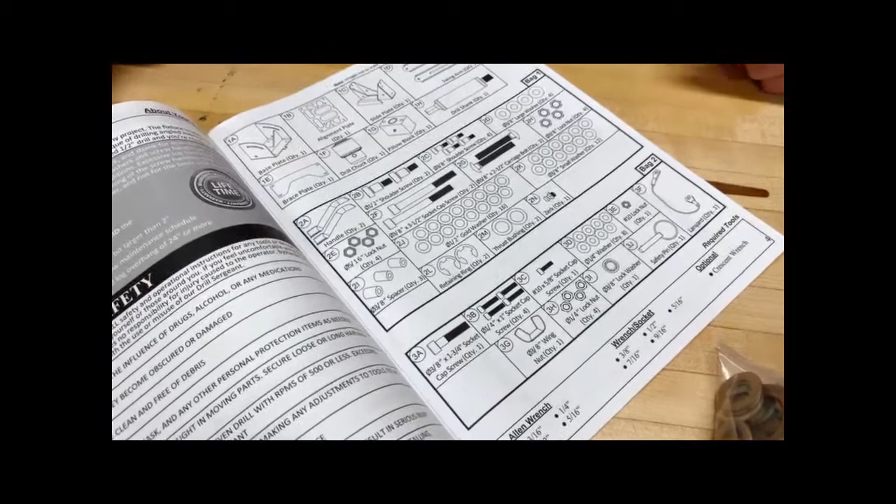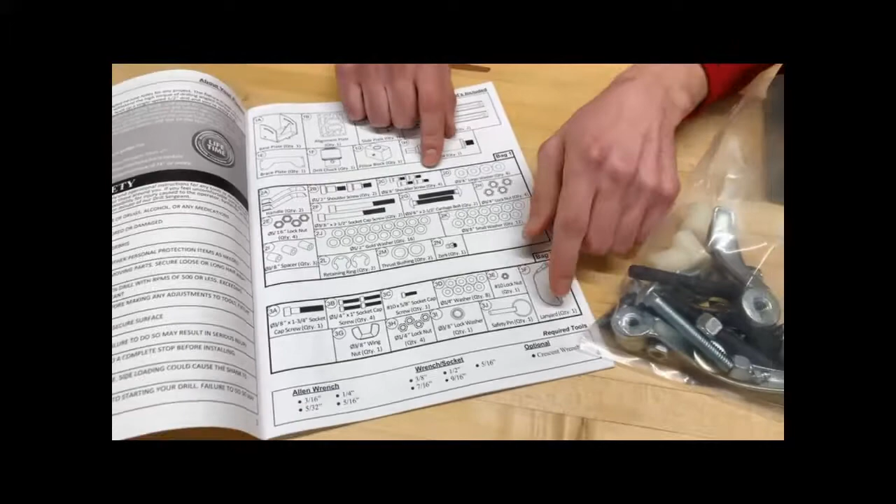Before we get started, it's important to always check in the manual that everything in your box is accounted for. You'll want to check the items listed on top here and reference them to make sure they're in there. There'll be two separate parts bags, labeled 1 and 2, and you can see that on the manual as well. There's also a list of required tools to assemble this.

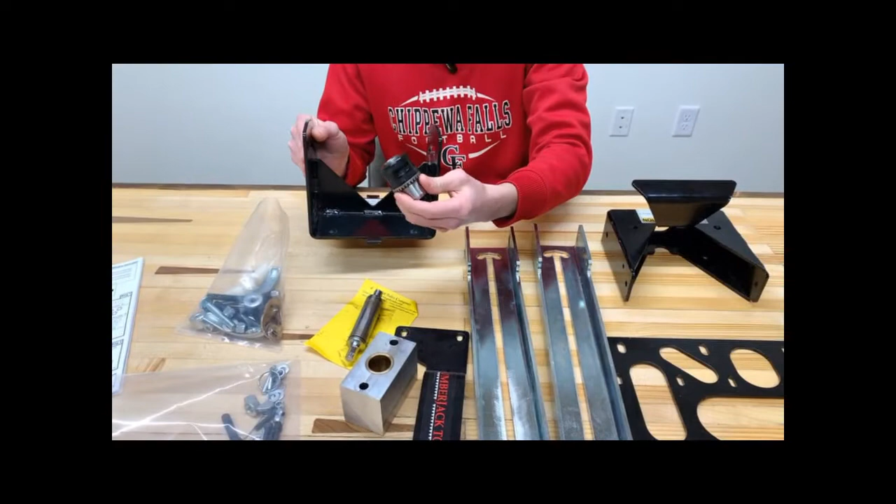You'll see that there's a box that holds both of your arms. There'll also be a wrapped brace plate that goes on top. The base plate will be in a box with the drill chuck, and there will be a box with the slide plate, which includes the shank that goes with this. Lastly, the base plate, always check on the bottom of your box. This is going to be in the bottom of your box wrapped in paper.

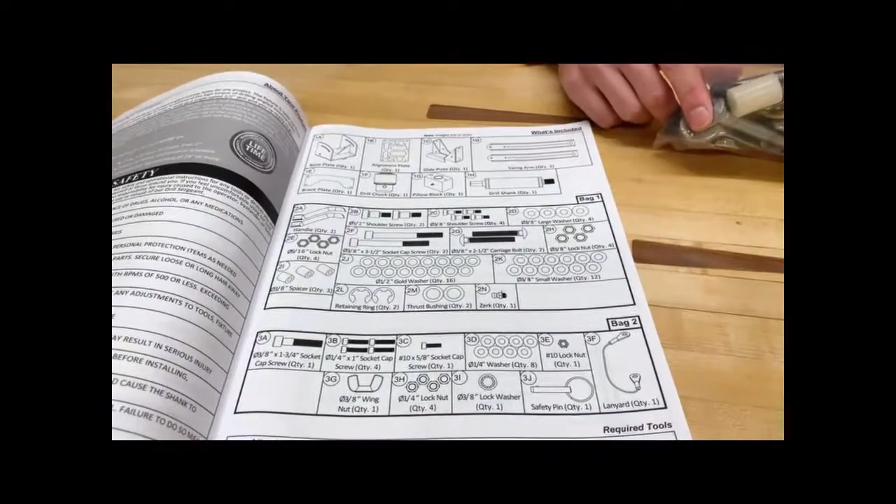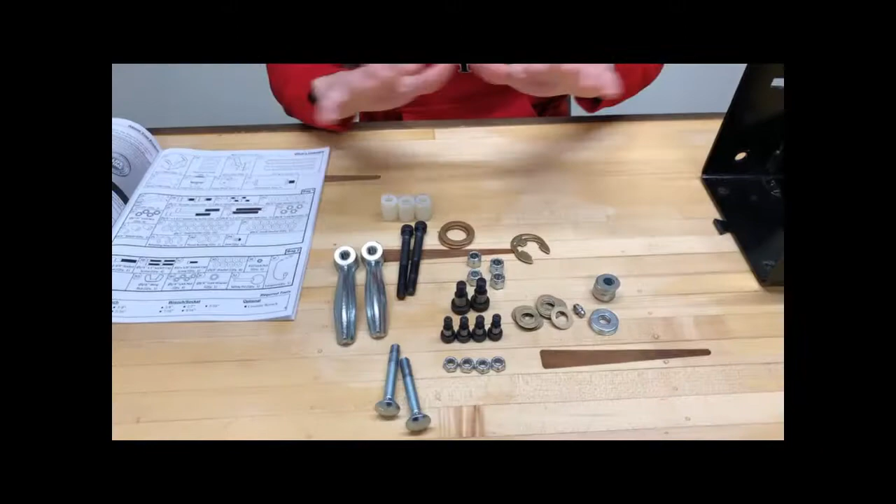The first step is to lay out all your parts here. We're going to start with bag 1, and empty this bag out. Then with a little bit of magic, we'll get these all organized. Just like that, they're all organized.

This first step is going to be attaching the arms of the Drill Sergeant to the base plate, so we'll show you how to do that here.

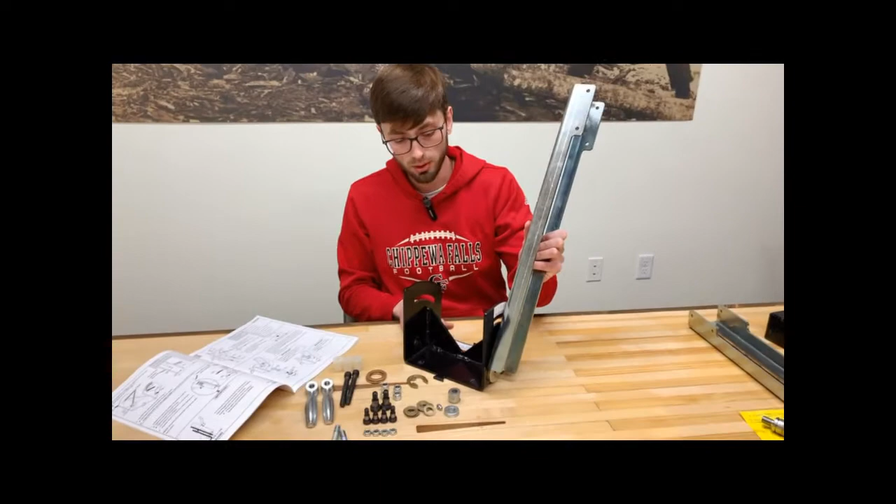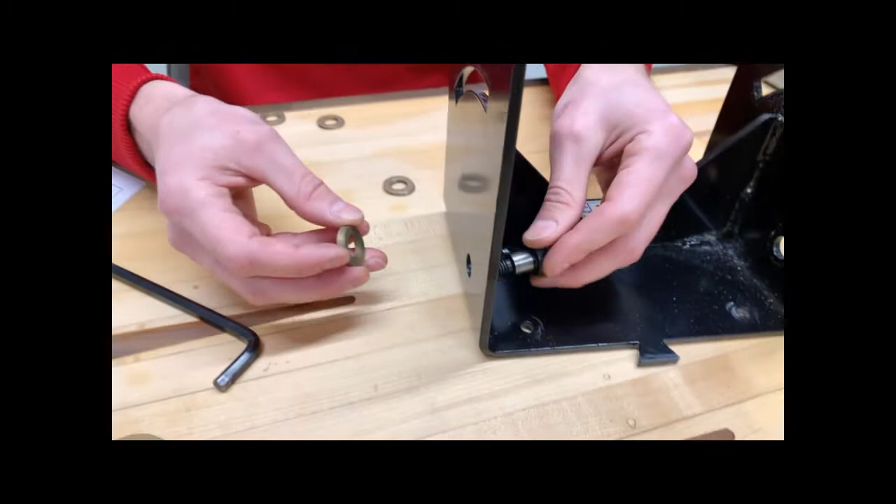To get started, first we need the 1/2-inch shoulder screws, which are part 2B in the manual, and we'll need the gold washers, part 2J. It's a 1/2-inch washer, and there should be 16 of them in your hardware kit. So we're going to set 4 of these on the outside. You want to stick your shoulder bolt through the bottom, and it should just sit in there just like so, and put your washers over it.

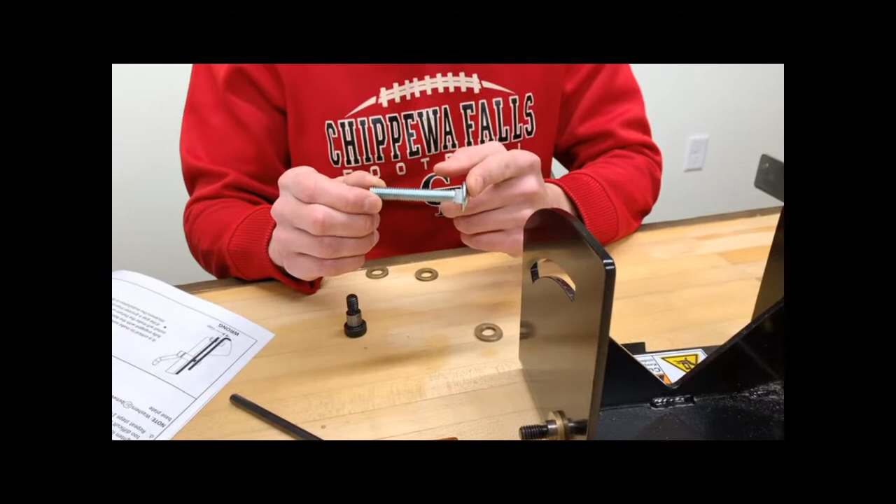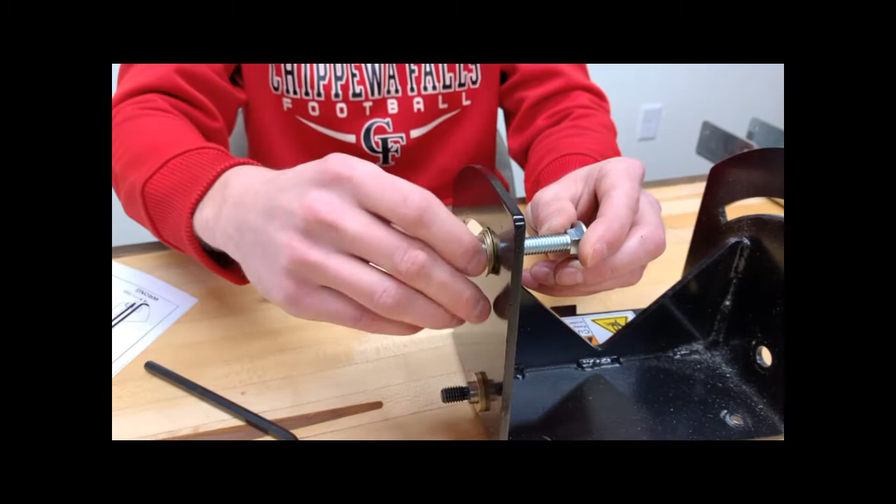Then we're halfway there. Next you'll need the carriage bolt, part 2G, and you're going to also use these washers on it as well. You just want to get it started through here, because we're going to have to attach the arm to it, and put your 4 washers over the outside of this. Then you're going to take your arm and carefully line up the holes so that it should go through both of these at the same time.

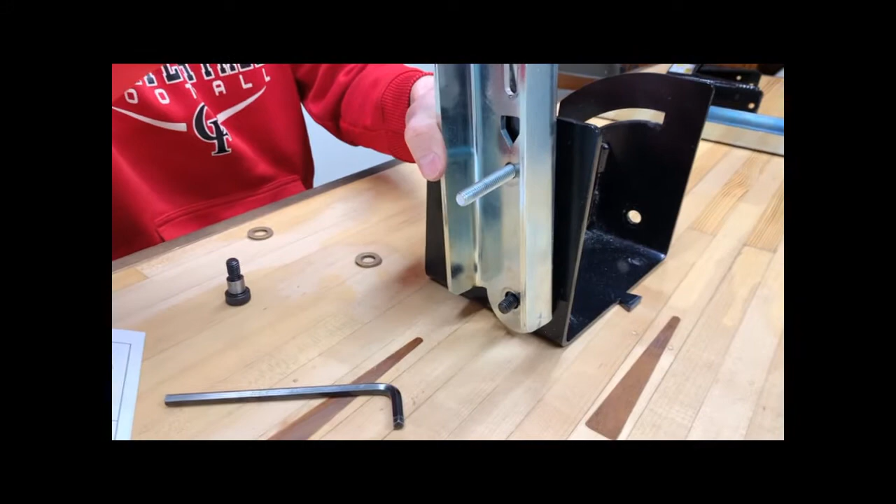And then you can very carefully attach your nut to the shoulder bolt at the base.

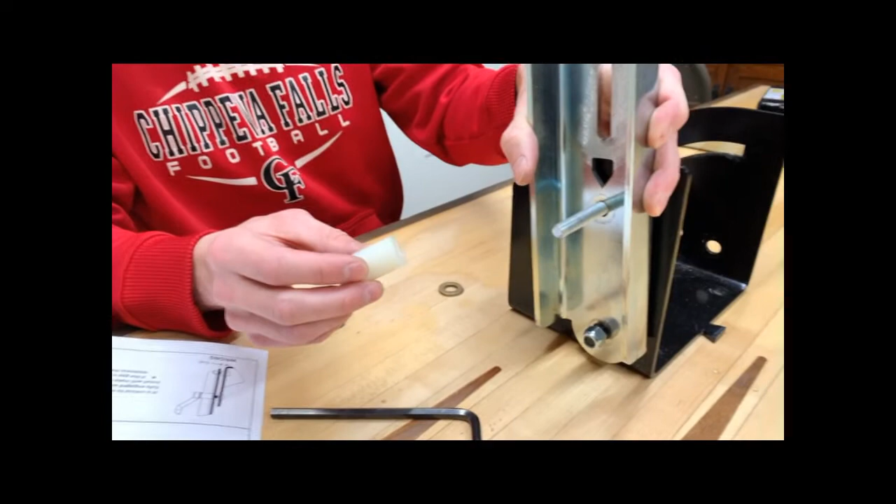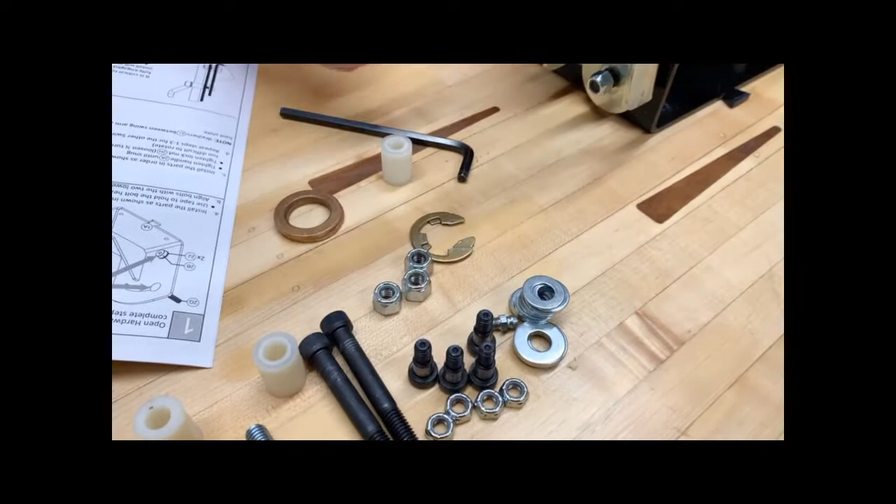Then to secure this carriage bolt, you'll need these nylon spacers, part 2I. But before we put that on, we actually need one more part: the 3/8 inch washers, part 2K. Always be sure to reference your manual and your parts, because there are a lot of parts in here and you don't want to mix them up.

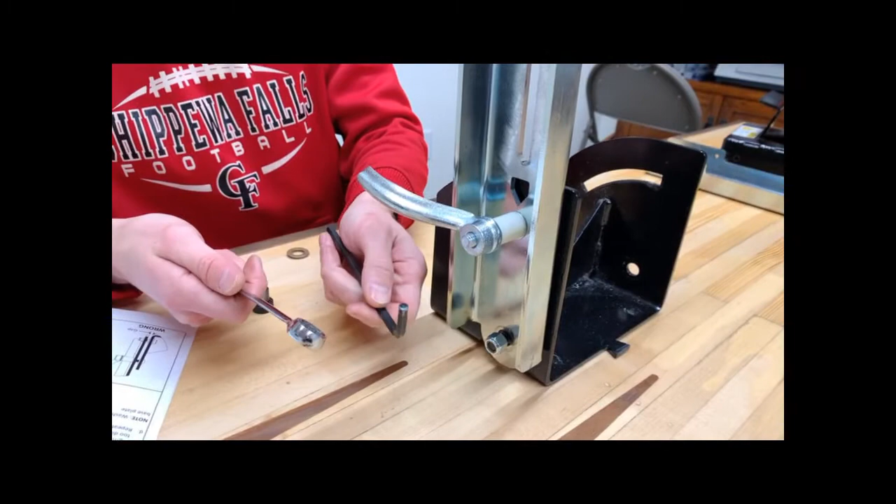Then lastly, to secure that carriage bolt, we need part 2A, the handle nut, and that just turns on righty-tighty. You'll just want to turn that till you feel it firm up. Then I'm going to take a 9/16 inch wrench and a 1/4 inch Allen wrench to tighten up the shoulder bolt.

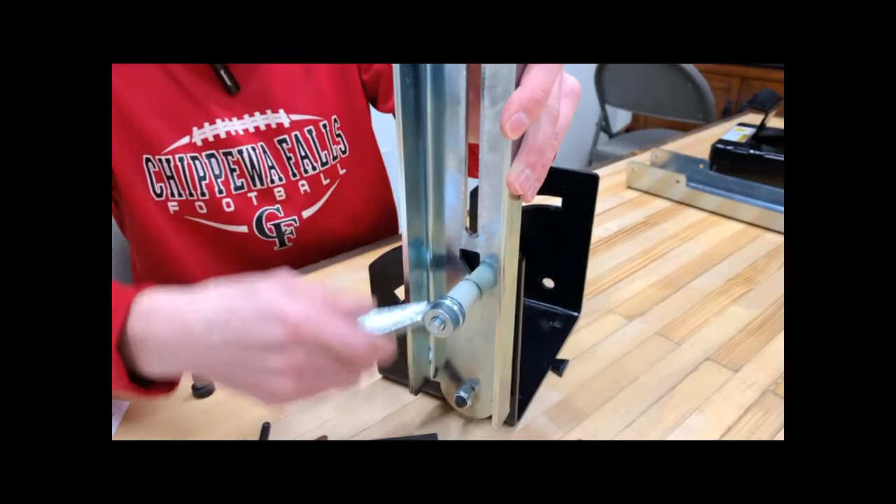Once you've secured your nylock nut on the shoulder bolt, just give your arm a test by gently loosening this handle, and test that the arm can freely adjust before moving on.

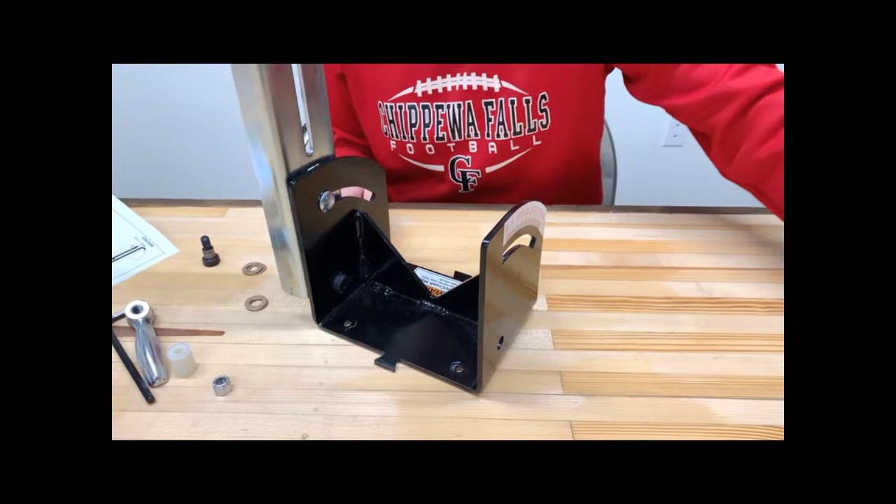Next we'll attach the other arm to the same base plate, just on the opposite side. A point of note is that it's easier to attach these with a second person, because you're holding up multiple items at once, so it's always good to have a second helper.

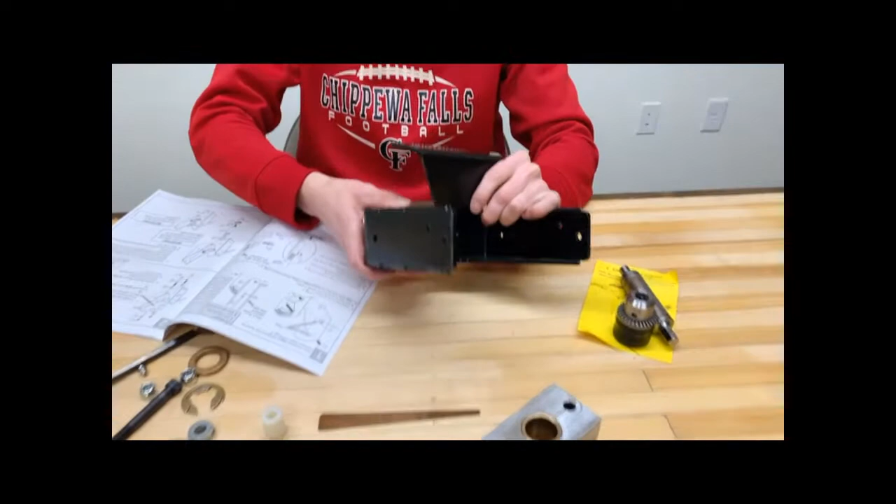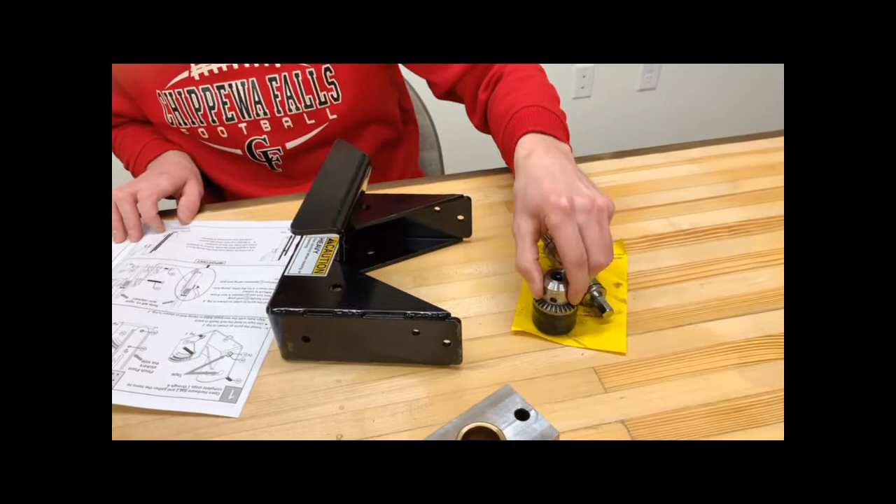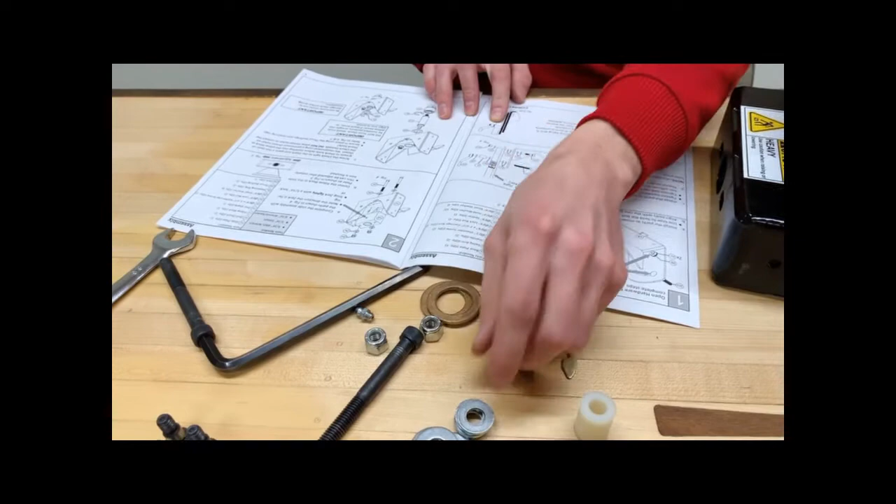For step 2, we're going to complete the slide assembly. This is what goes in between the two arms on the Drill Sergeant. You're going to need part 1C, your slide housing, part 1G, the pillow block, part 1H, the shank that goes in the pillow block, part 1F, your drill chuck head, part 2L, the retaining rings, and 2M, your thrust bushings, and 2K. Pretty much everything except for the nylon spacer, and these 4 parts over here, we're going to need all of these parts.

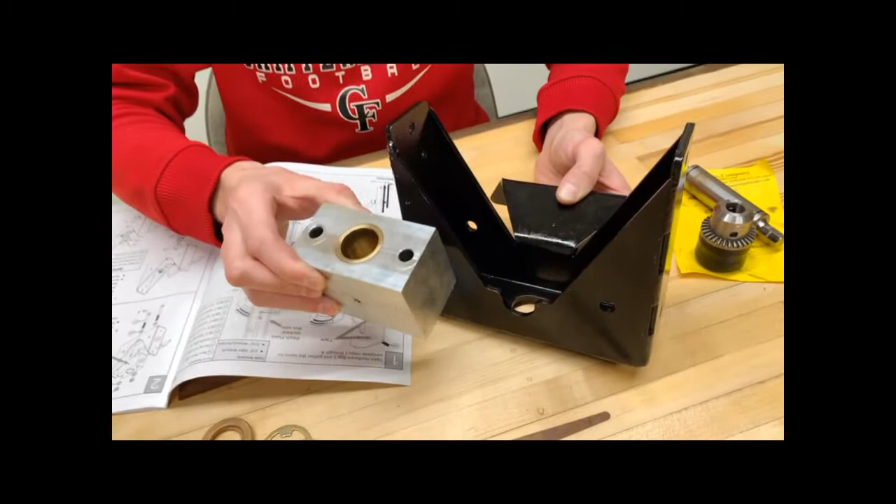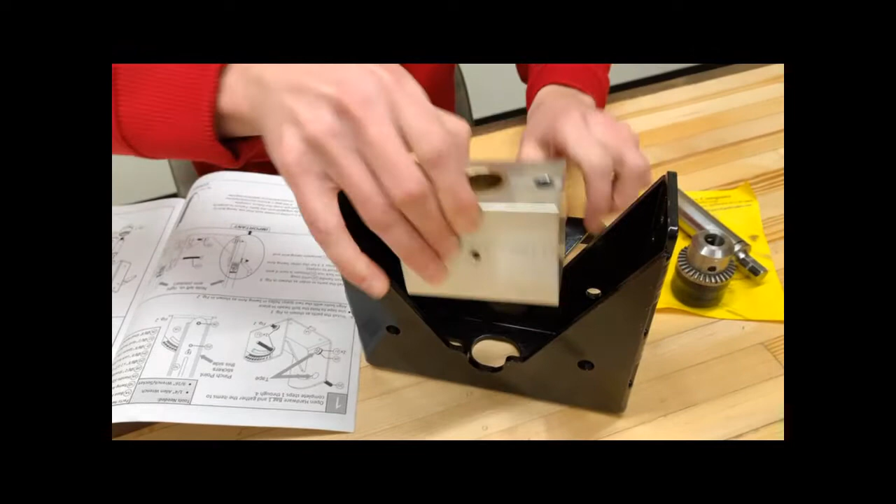For the first part of this step, we're going to put the pillow block inside of the slide housing. It's important to make sure that there's a threaded hole on the front of your pillow block. That needs to be facing in this little U channel here, because otherwise you're not going to be able to put the grease in your Zerk. So you need that hole facing forward.

Then next we're going to need part 2F, which are these big bolts here, and part 2K, more of these 3/8 inch washers. You're going to need a 5/16 inch Allen wrench to tighten these, and a 9/16 inch wrench to hold your nuts.

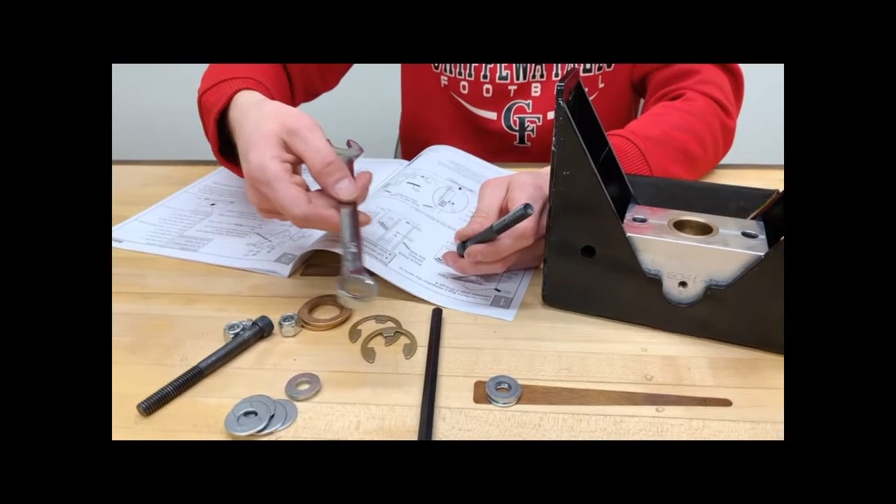Okay, so then we're going to put part 2K, this 3/8 inch washer, over the 3.5 inch socket cap screw, just like so. And then through the bottom of the slide assembly, it's going to come up and your bolt head will stick through. Same thing, this part 2K 3/8 inch washer, and then a 3/8 inch nylock nut to secure that down.

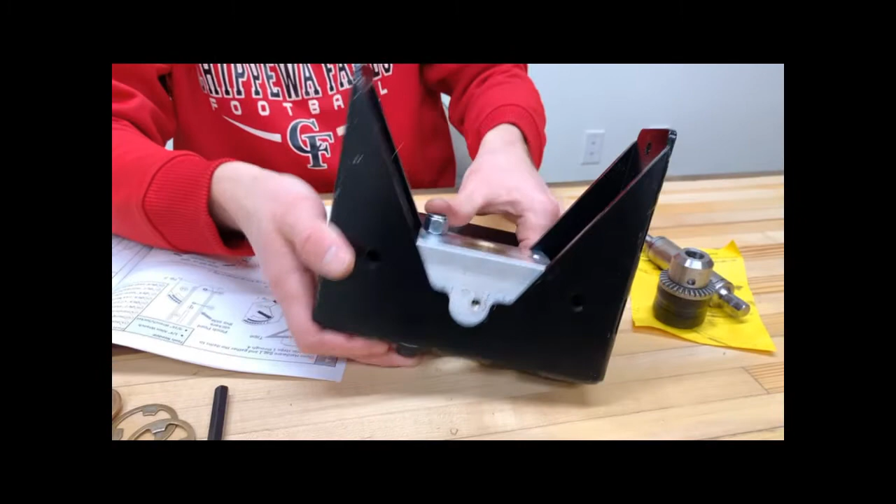Then you just hold the screw with your Allen wrench, and then using the socket wrench, you can tighten this down.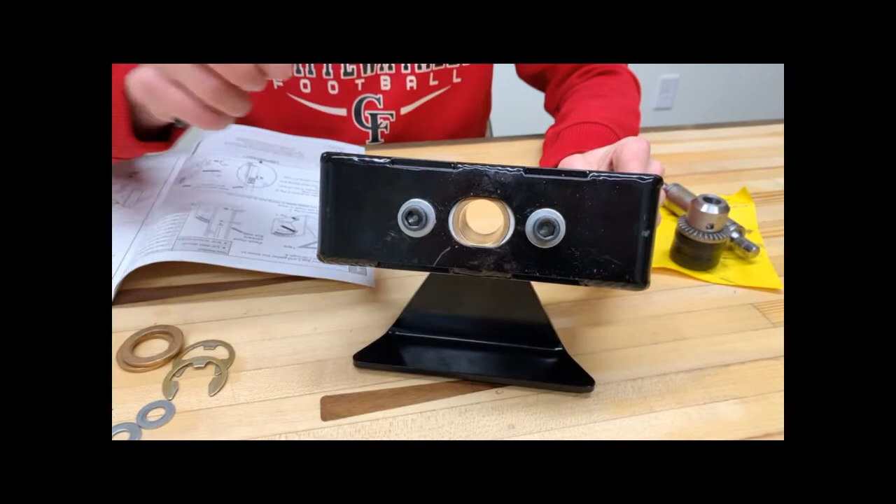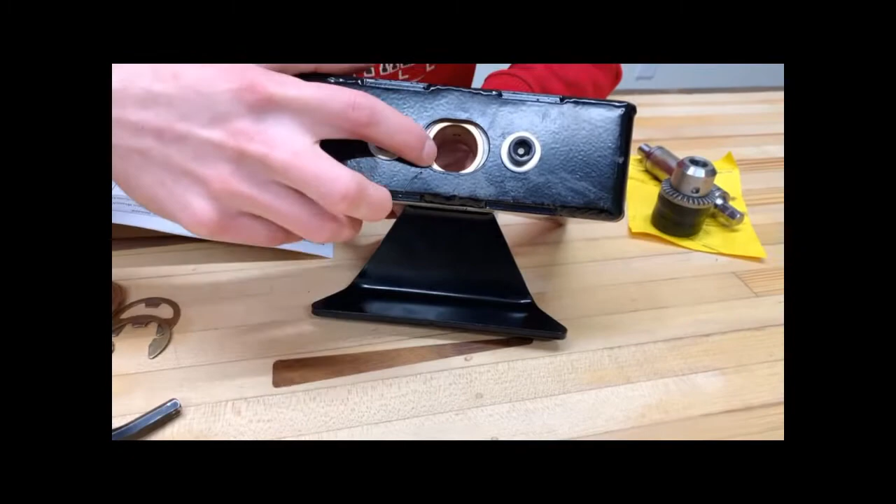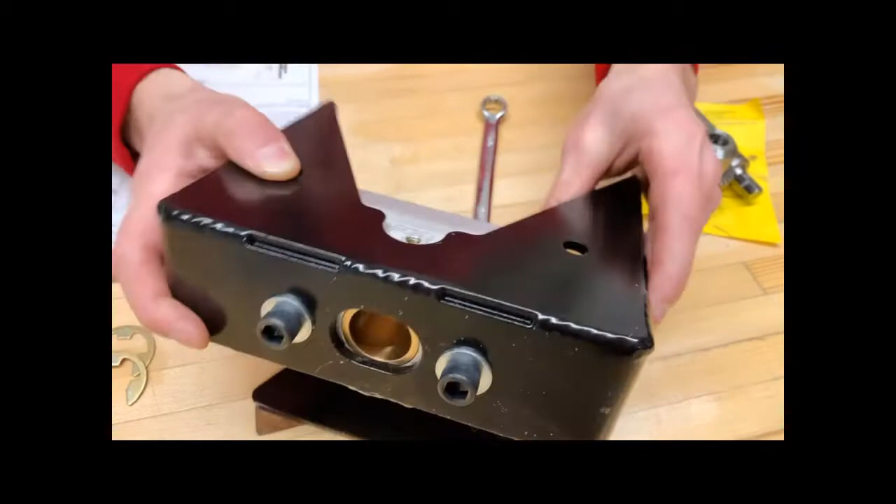So before you fully tighten your pillow block in this assembly, it's very important to make sure that this is truly centered, otherwise your holes are going to be off. As you can see here, I can slide this block back and forth. So you can either center it by looking down the middle here and measuring off both sides, or I like to look in this little U at the bottom and just make sure that my hole is in the middle of there. Then you can rest this like so on a workbench, and tighten it once you know that's in the center.

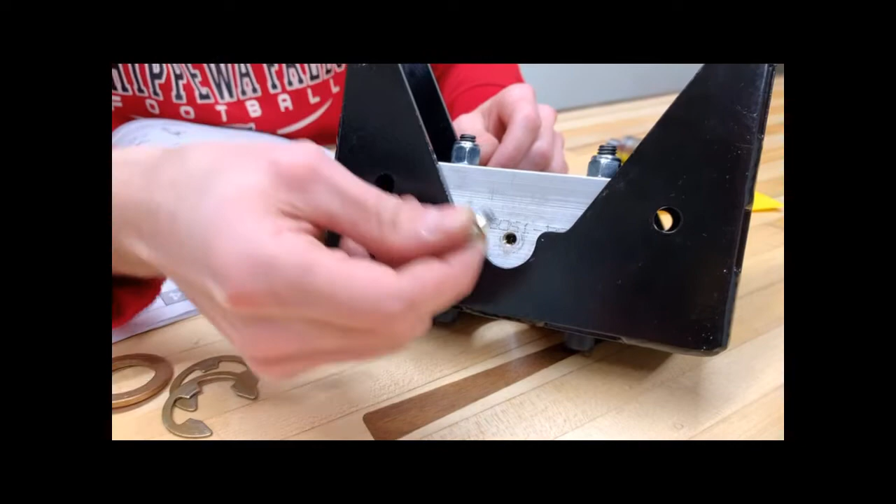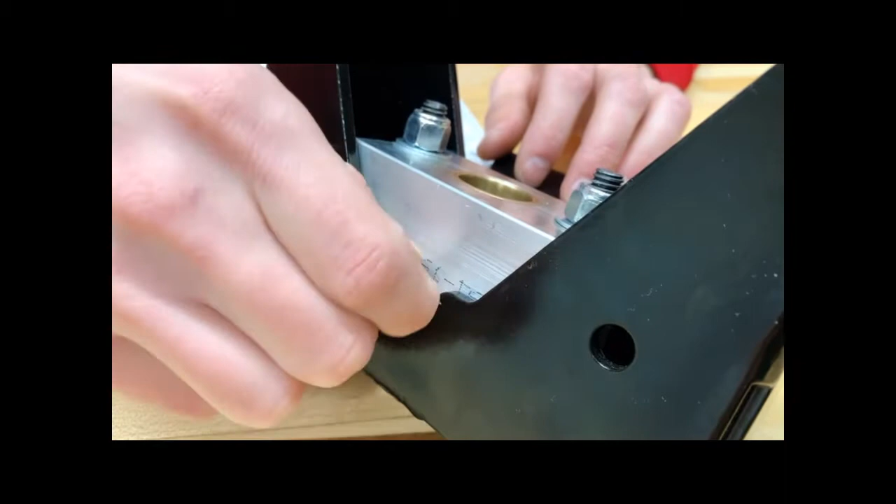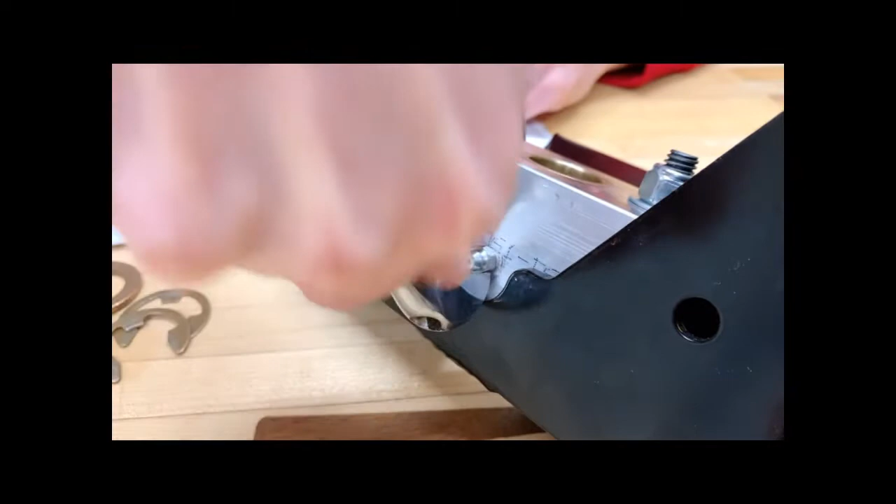Then you need to screw in the grease zerk into the pillow block once everything's secure. It's righty-tighty, lefty-loosey, so I'm going to start this by hand carefully not to cross-thread it. Then I'll grab my crescent wrench and just lightly tighten it. You don't want to over-tighten this and risk pulling any threads. Just a couple of turns to make sure that it's snug, but not too snug. Feel it start to tighten here.

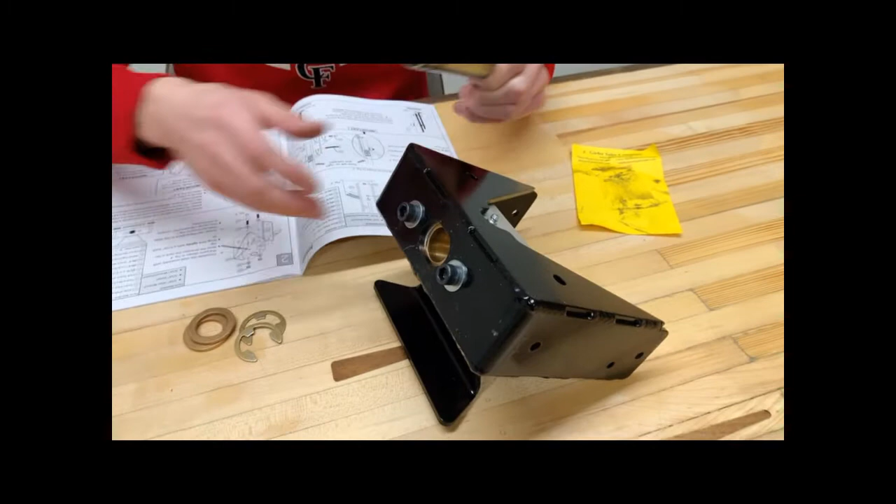Okay, so the pillow block is installed with the grease zerk. Now we're going to slide the shank, part 1H, directly through the hole in the pillow block, and it should slide. It's going to be a tight fit, but it should slide perfectly. And we have 2 thrust bushings and 2 retaining rings.

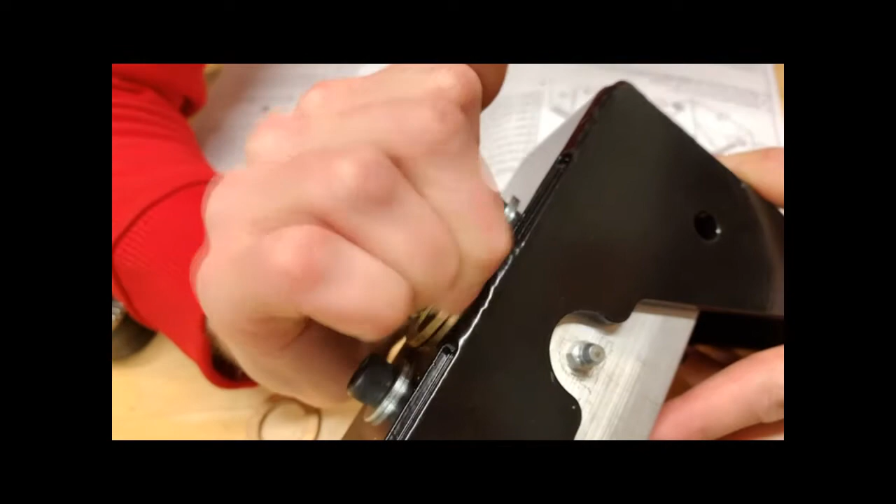So now we're going to take a thrust bushing and put that over. And then the retaining rings, they require a little bit of force, but see this groove right here? These will fit right into the groove, and you push them down. It takes a little bit of force, but it'll snap down, and you'll see it actually hugs around the shank, so it's not going to pull back through. Then it's the same process on the other side.

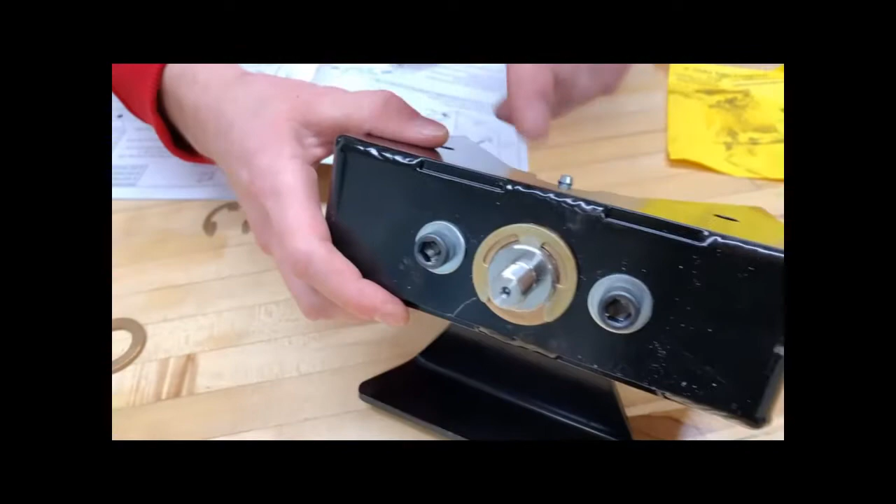Now you put the thrust bushing over, and I'm going to pop one of these on, again, the retaining ring.

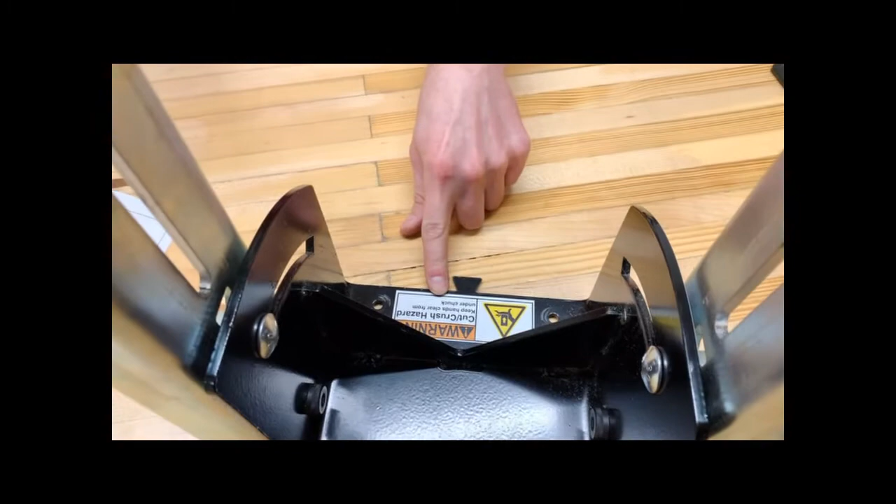Before we install the slide assembly, we have to take the base with the arms here, and we want to lay it down with the back side down. The way you'll know that is there's this cut crush warning on the back, so that's going to be pointing down towards the table. We'll just lay it back like so, and then we'll install the slide.

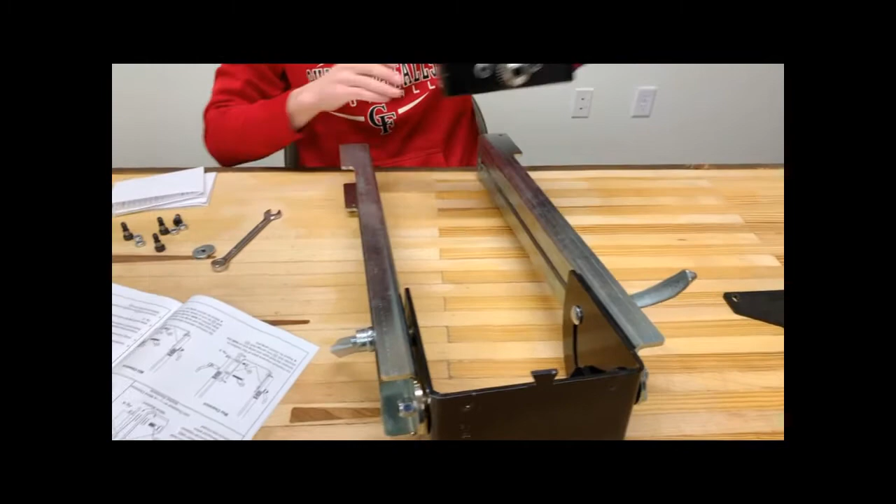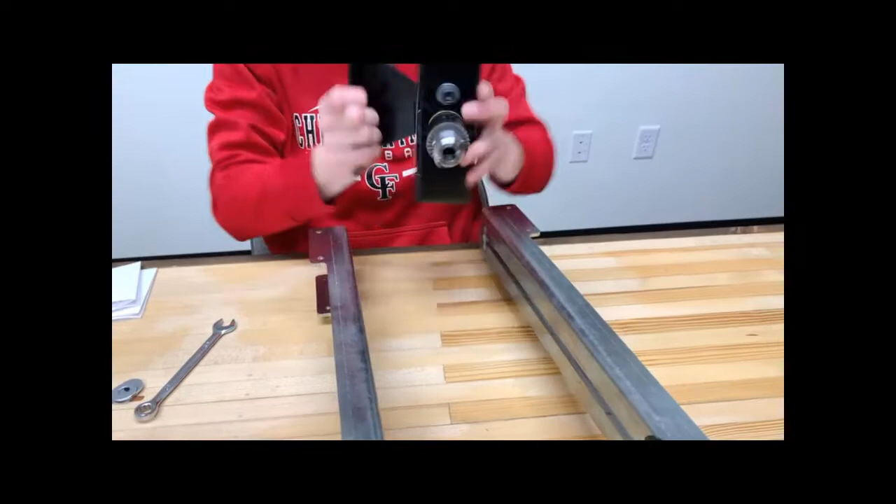And we want to make sure that this handle is facing on the front side and not pointing down towards the cut crush sticker. You want the handle facing away from that.

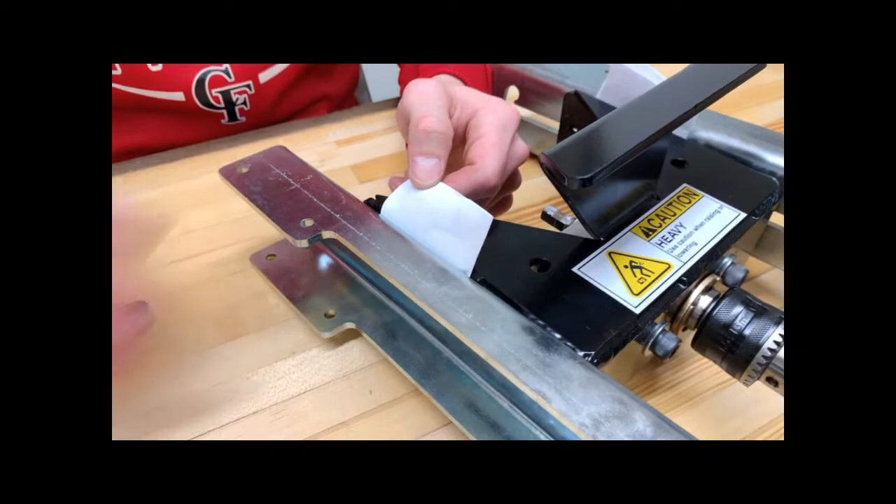Alright, so another tip we point out in the manual is to use paper spacers on both sides of the slide when you're installing it. The purpose of this is to keep the arms from actually touching the slide, so once everything's tightened up, this will freely move up and down without getting caught. You want to take just a blank piece of 8.5 by 11 paper and fold it in half 3 times, and then it will slide on both sides of this.

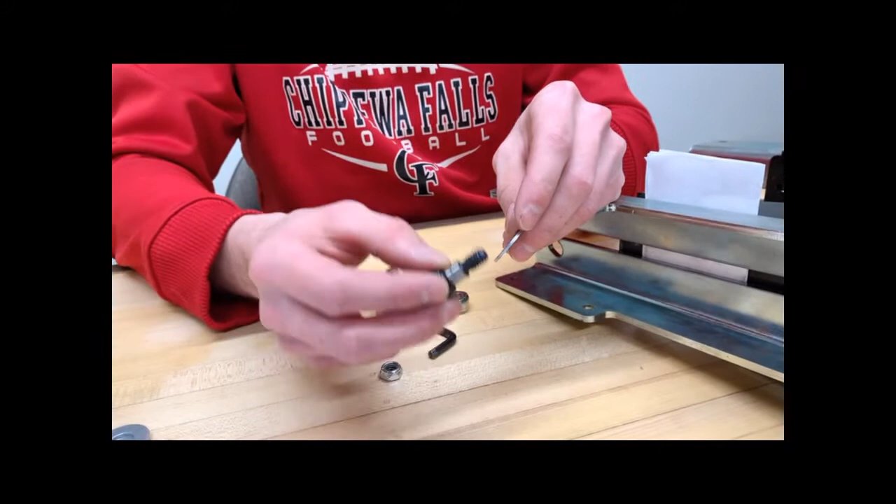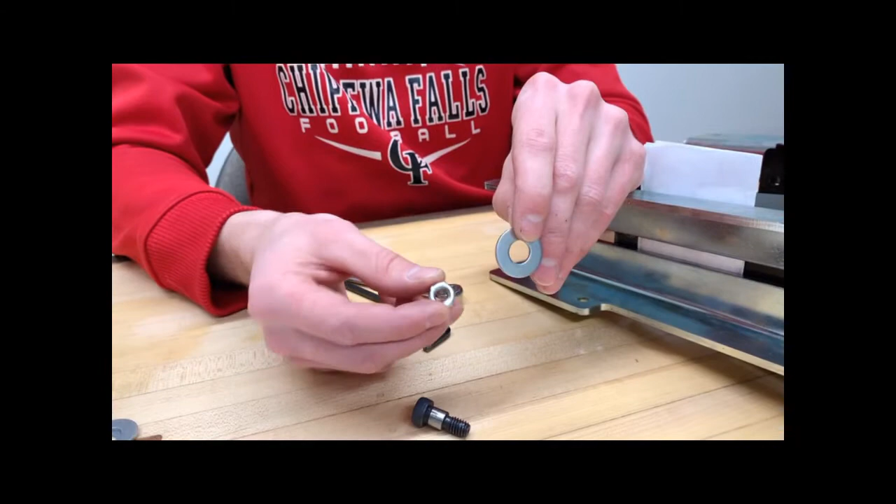So then to install the slide, we're going to do this 4 times. We need part 2C, which is this 3/8 inch shoulder screw, part 2D, the oversized washer, and part 2E, the nylock nut. The washer will slide over the shoulder portion of your screw, and then you'll see there's a little hole on the side here where this is going to get threaded into. So I'm just going to get that started, and it should hand tighten.

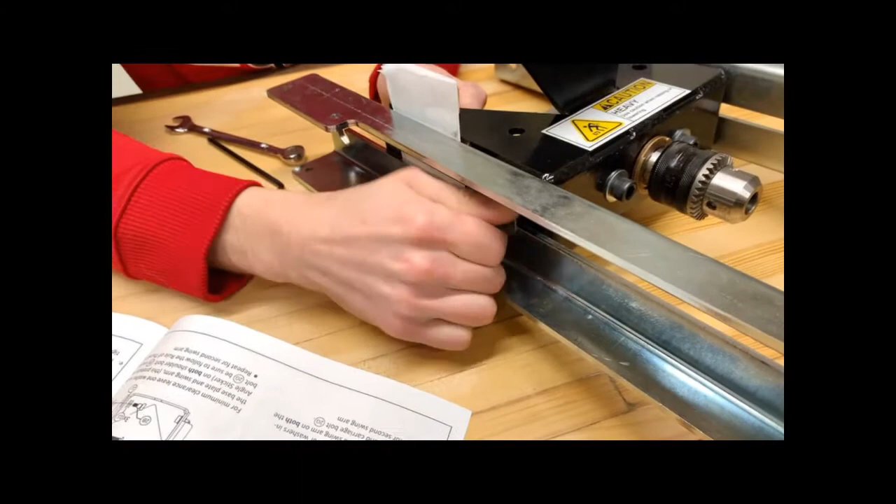It'll kind of get itself started in there, and you can use your Allen wrench to help finish it if it gets a little caught.

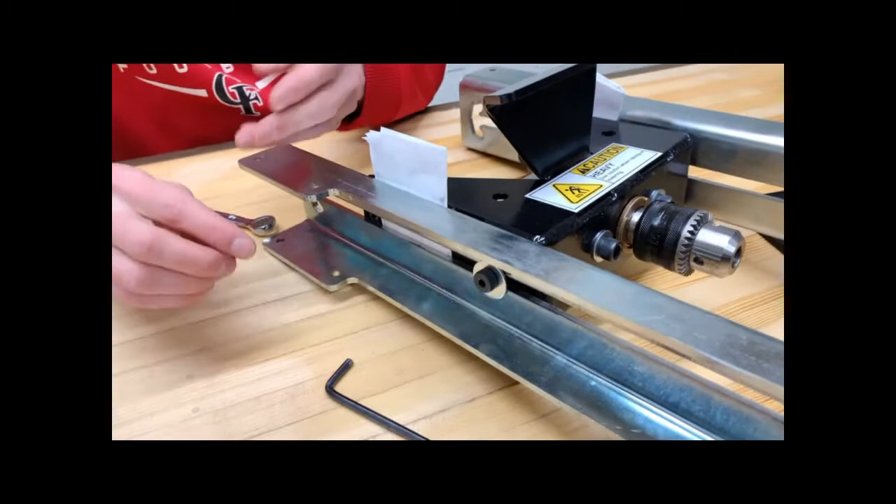Then you'll feel it stop once it's all the way in there. And since this is the lower one, it gets a little tight down there. So what I like to do is put the nut on my middle finger, my longest finger, and reach down inside there. You can't see it, but I'm feeling inside this assembly for the tip of that screw, and then I just hold the nut so that it gets started a couple turns. Once that's actually on some threads, I'll take my 1/2 inch wrench so I can hold the nut in place tightly, and we'll tighten this all the way down until it stops.

So once you have your lower shoulder screw secured, we're going to put in the top 2 on this slide assembly. Same thing, just hold the nut with your wrench and tighten the screw with the Allen wrench.

Once all the nuts are tightened on these shoulder screws, you can remove the paper spacers from the side like so, they'll just pull right out. And this should, yep, it's sliding pretty good. Okay, so the slide's installed.

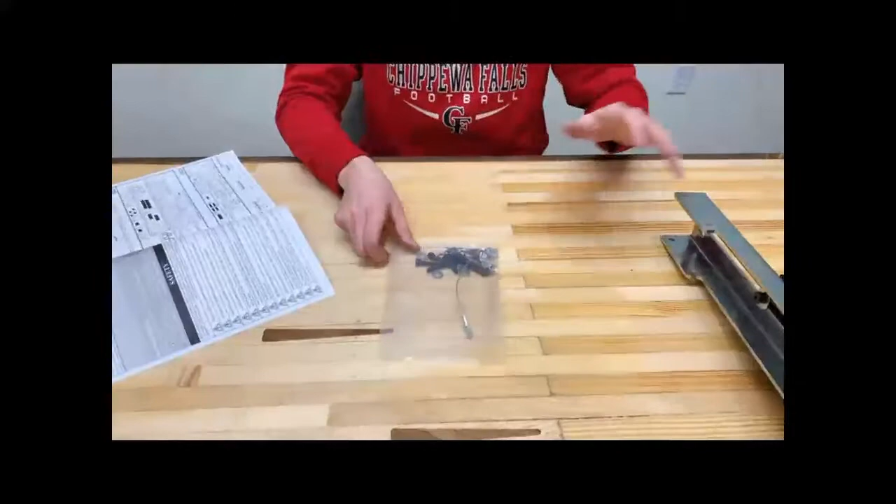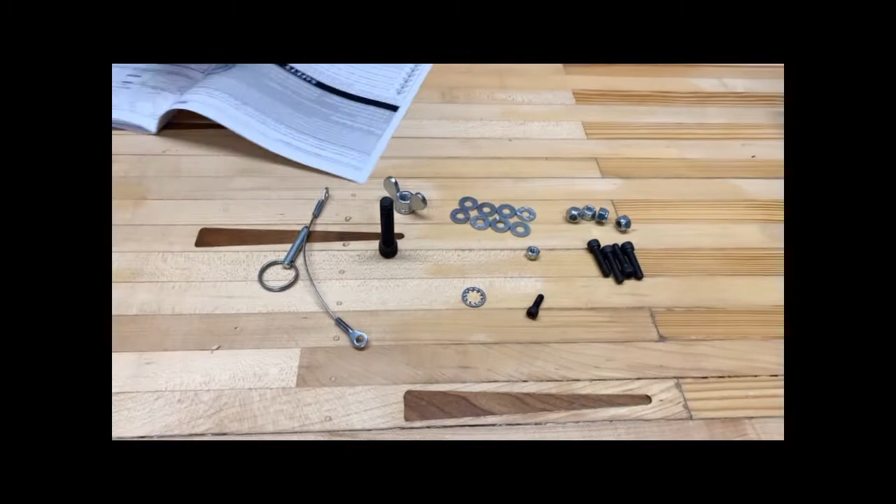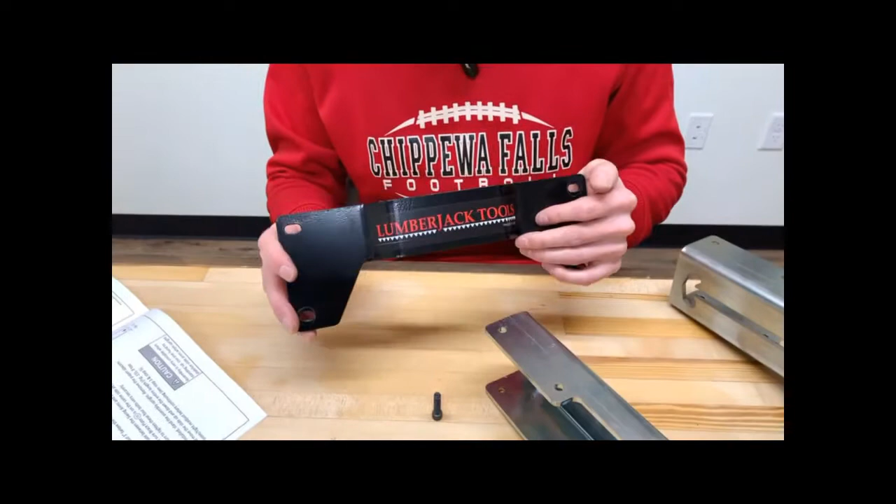So next we're going to need parts 1E, the brace plate, and then 3B, which is your 1-inch socket cap screw, 3D, which is your 1/4 inch washer, and 3H is the 1/4 inch nylock nut. We're going to need all of the washers and the screws and nuts from that part.

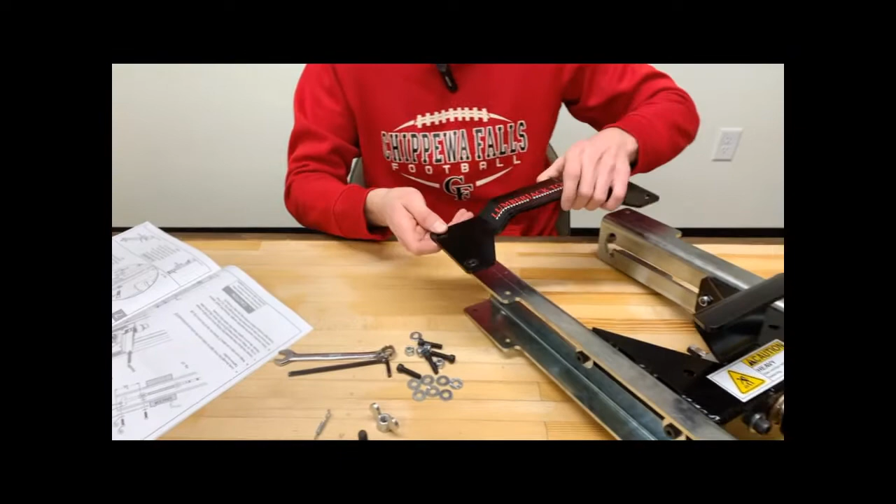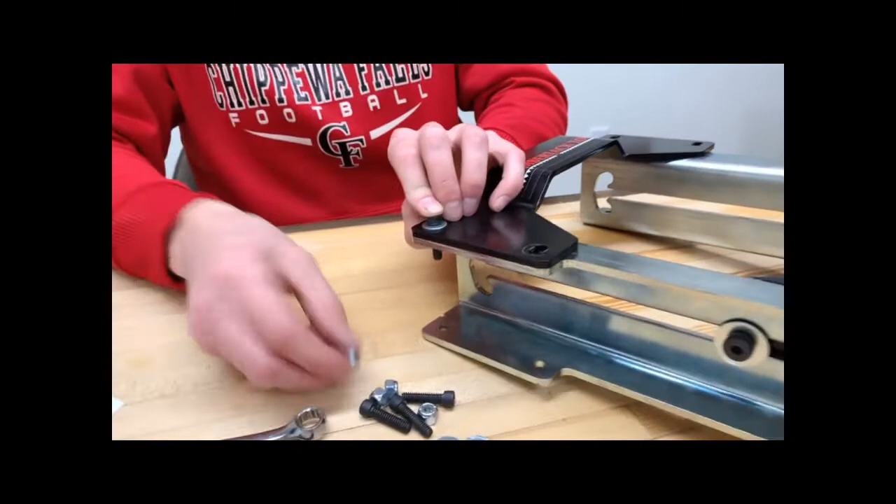To get started, we're just going to secure just one side of this brace plate, so if we have to make any adjustments by widening it. Take your washer, put it on your screw, put it through, and then same thing, put a washer on the bottom of that, and then a nylock nut to hold it all together. Just get your nut started, and you can hold that in place with a 7/16 inch wrench.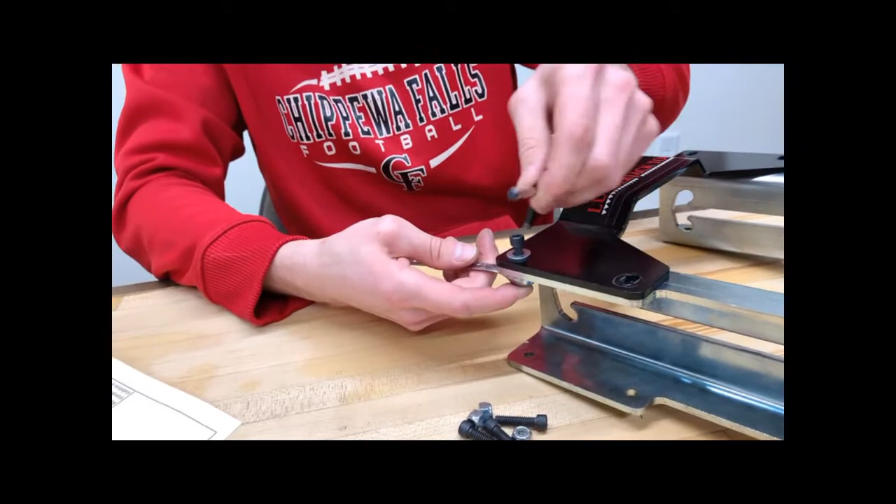And then I'm going to use a 3/16 inch Allen wrench to tighten this down.

So before we go ahead and completely secure this brace plate, take your slide assembly one last time and just make sure that you can go all the way to the top without feeling any resistance. This might be hard to tell, but I like the smoothness that this is gliding at, so we don't have to make any adjustments.

If you did need adjustments, you're going to need a second person to actually hold the arm. I can manipulate this by myself, but you need somebody to hold this out, and then you would tighten it down. But since I like the way this slides, I'm just going to let it freestand and go ahead and tighten this all the way.

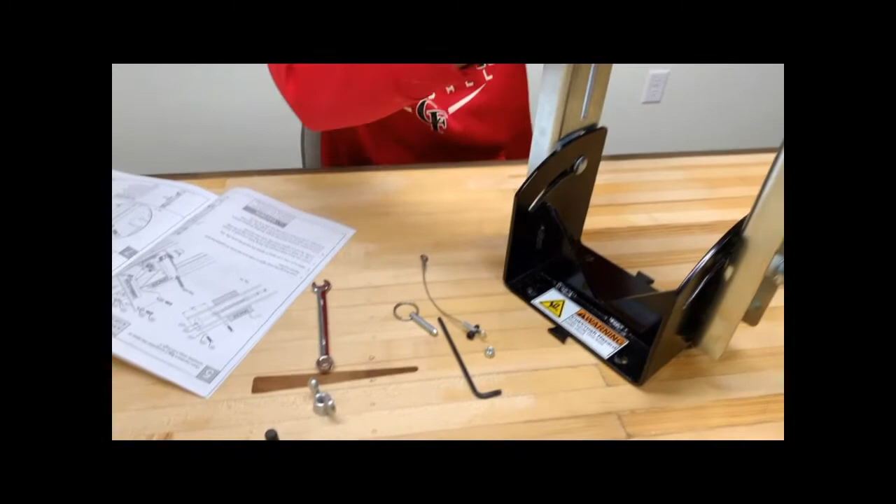Okay, so for part 6, we're going to attach the safety pin to the slide assembly, which is very important because that protects this slide from ever coming out and just free falling down. It can hurt your hand or somebody else.

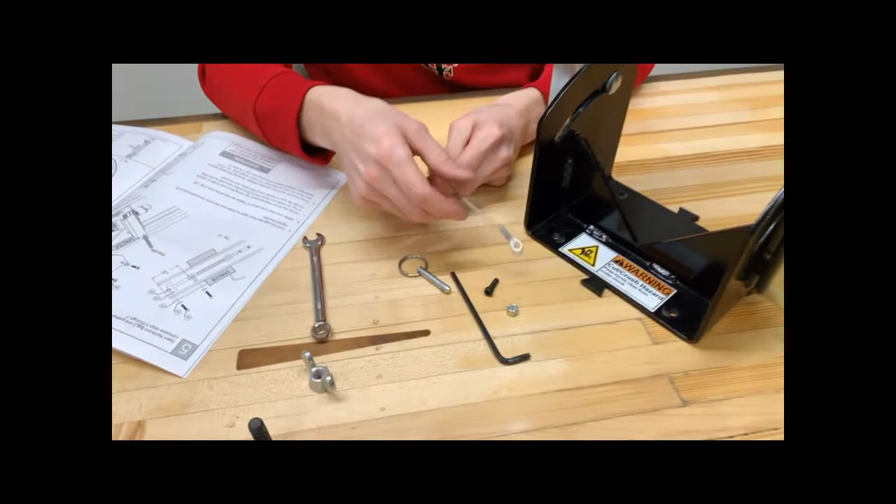So we're going to need parts 3C, which is the number 10 socket cap screw, 3E, which is the little number 10 nut, 3F is your lanyard, and 3J is the safety pin itself.

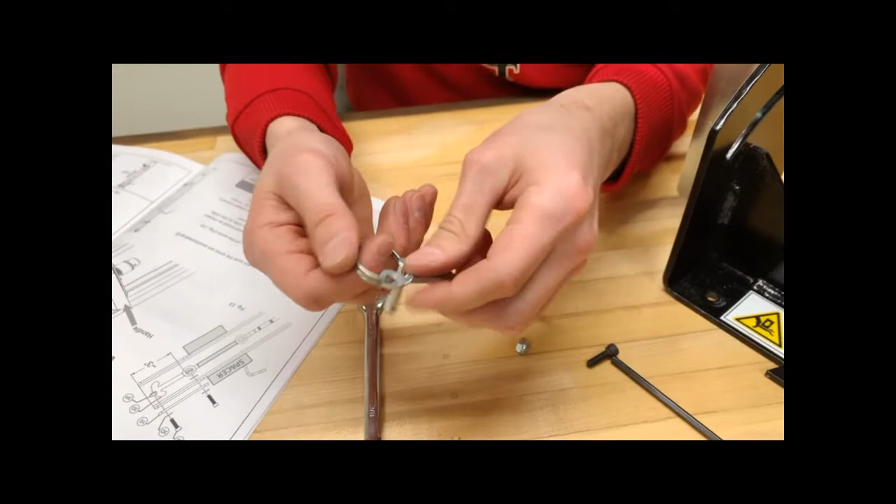So I'm going to start just by attaching the pin to the lanyard. That just slides on like any other keychain, there's just kind of pop the ring a little bit and twist it around.

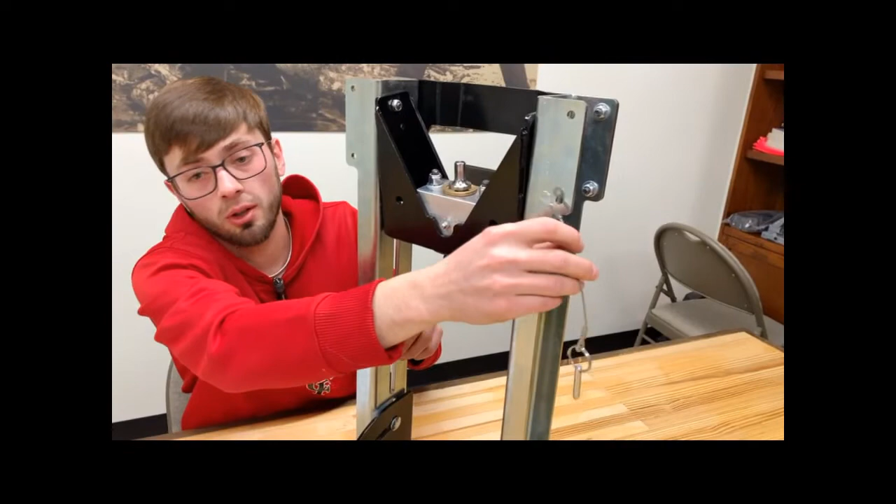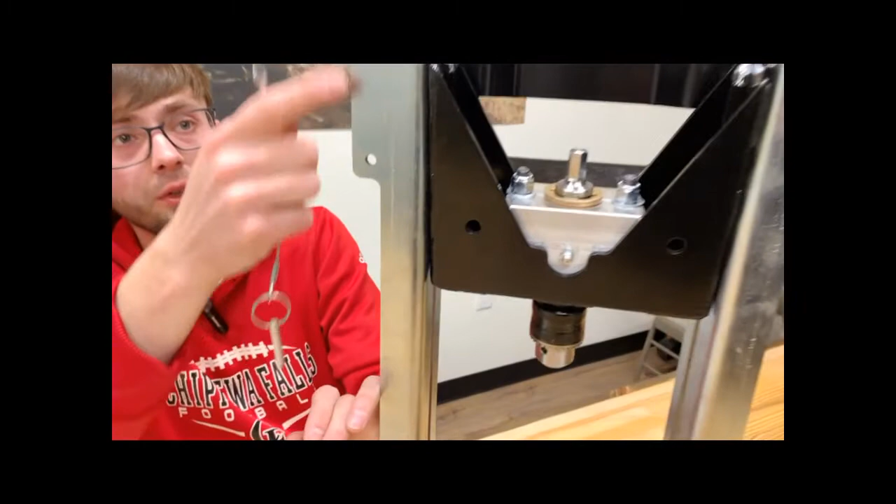Then this safety pin can actually be attached to the left or the right side on the drill sergeant. The manual shows it on the left, so for today's purpose we'll attach it to the left side, but it really doesn't matter which side you put it on. You'll see there's 2 holes on the back here, you want to attach this to the upper hole.

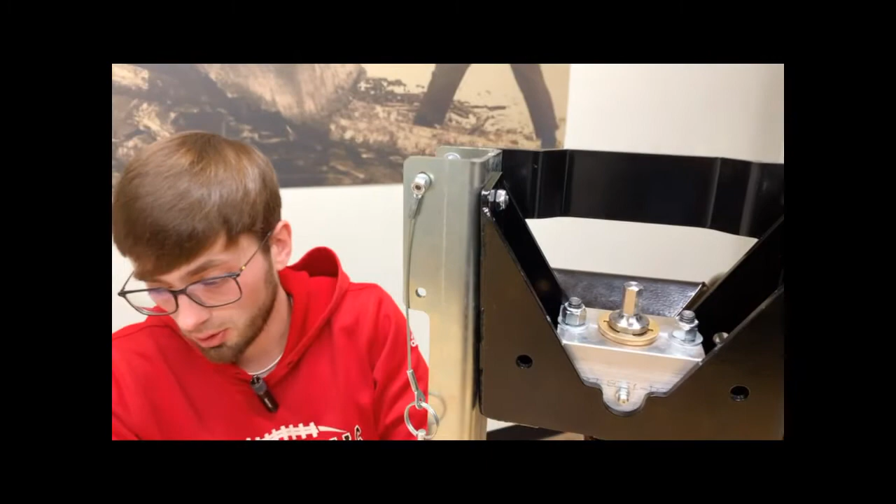So take your number 10 screw and pop it through, and then you can put the lanyard over that and take your number 10 nylock nut and just get that started, and then we'll use a 5/32 Allen wrench and a 3/8 inch wrench to tighten that down.

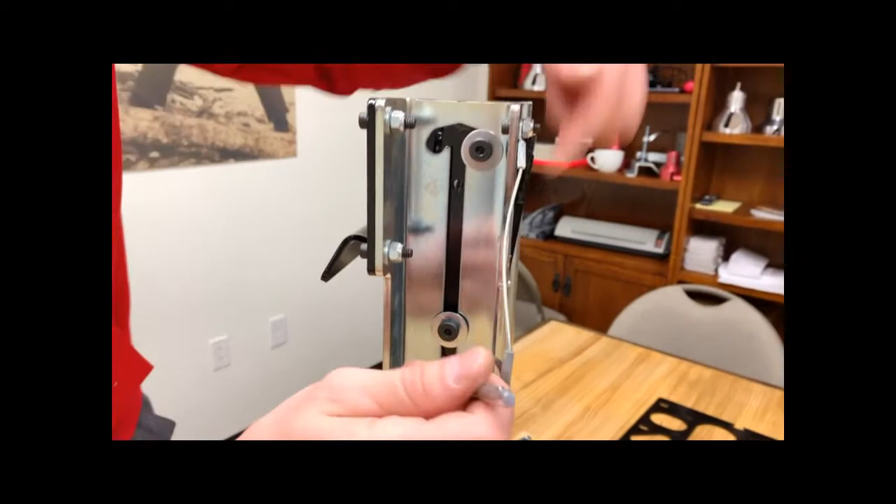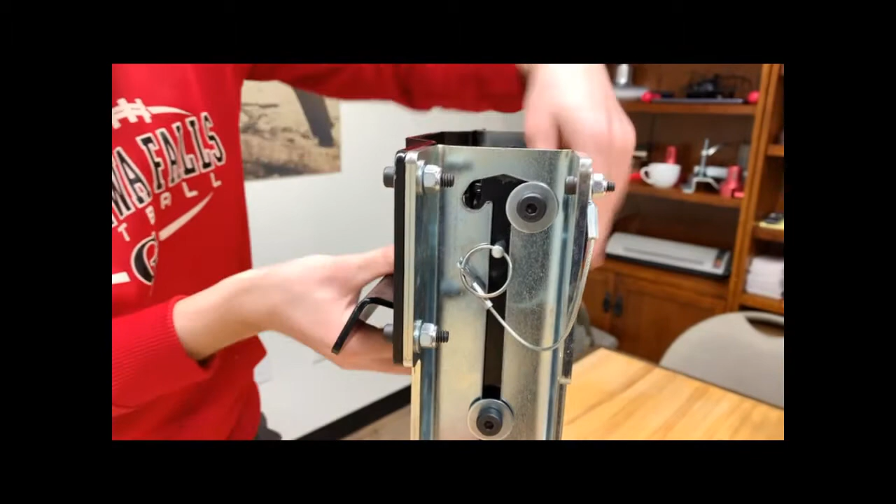So once your lanyard's installed on the side here, you'll see just on this channel there's a little hole where this pin is going to pop right through, and that's going to prevent your handle from accidentally falling forward and dropping down. Alright, we're on the home stretch.

If you made it this far, great job. The last step we're going to do is just install this, it's like a dead stop, so you can adjust your drill depths on the drill sergeant.

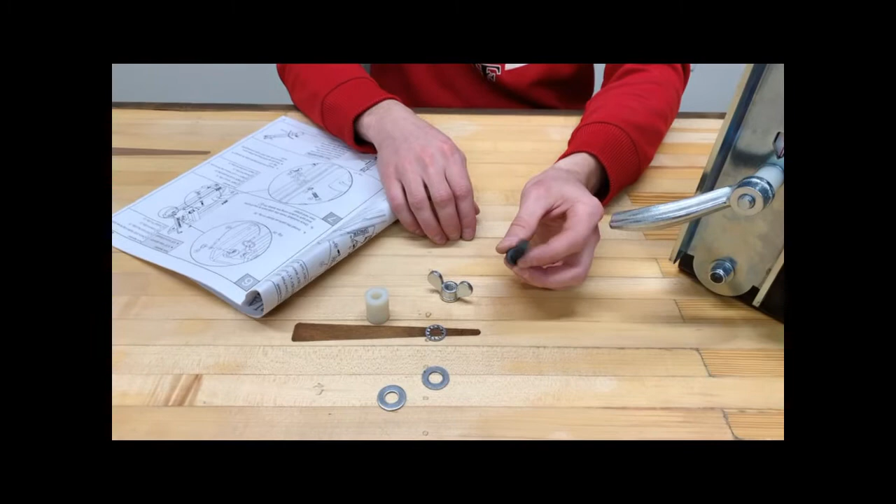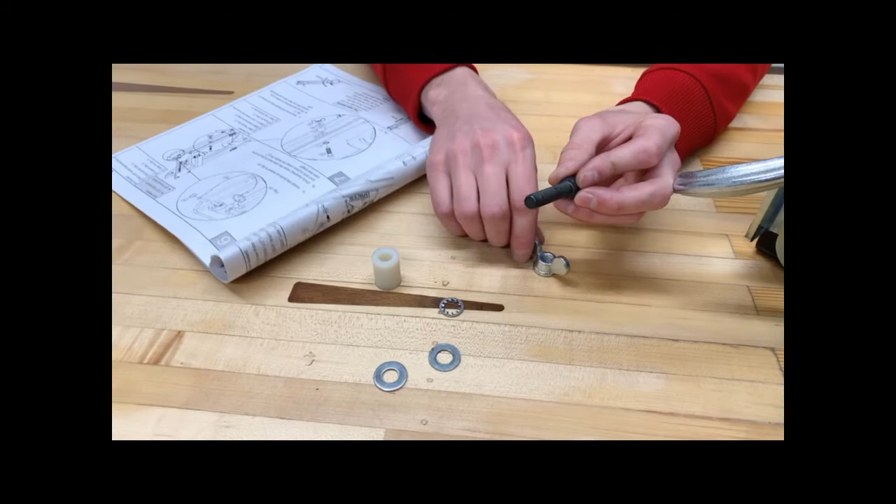So you're going to need parts 2I, again, which is your last nylon spacer, 2K, which are the 3/8 inch washers. You're going to need 3A, which is this 1 3/4 inch socket cap screw. And then part 3G, which is this wing nut, and 3I is the lock washer.

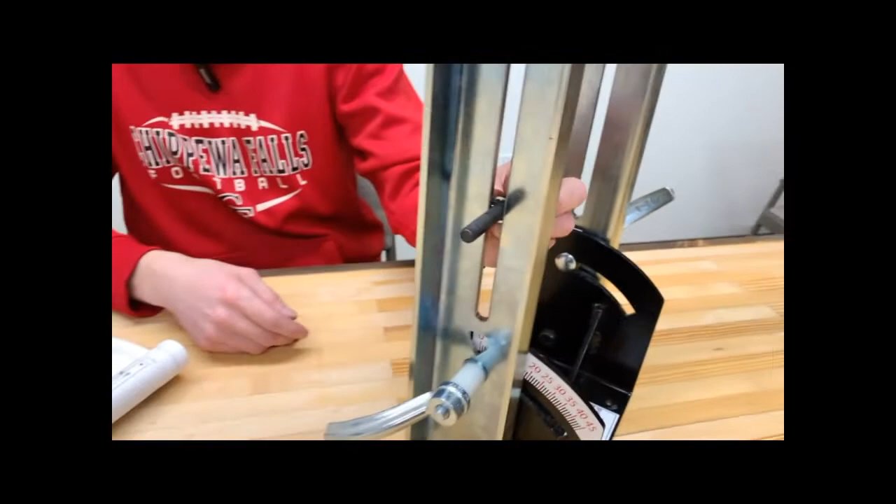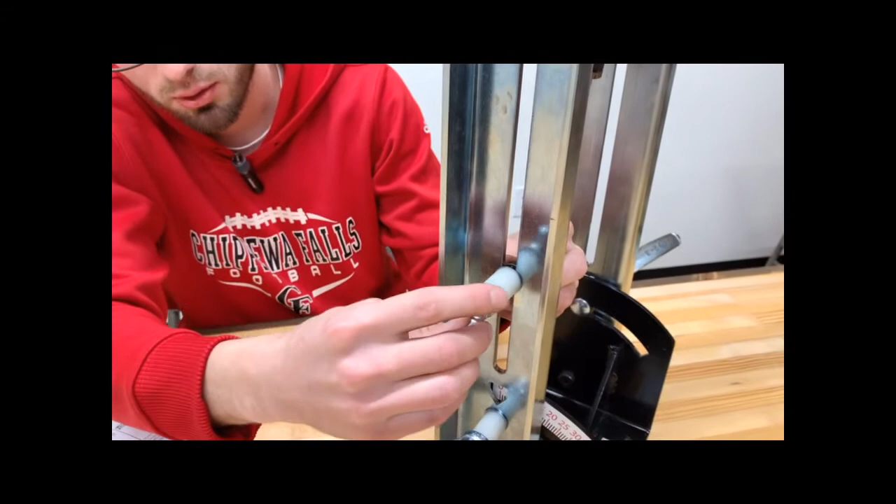So we're going to put the lock washer over the screw, and then this just goes directly through the side of the drill sergeant arm in that channel. Then we're going to take our first washer, slide that over, spacer, take your last washer, and then this wing nut just hand tightens directly onto there.

And you can set this at whatever height you want. If you don't want to use it as a depth stop, simply loosen it up and just put it all the way at the bottom.

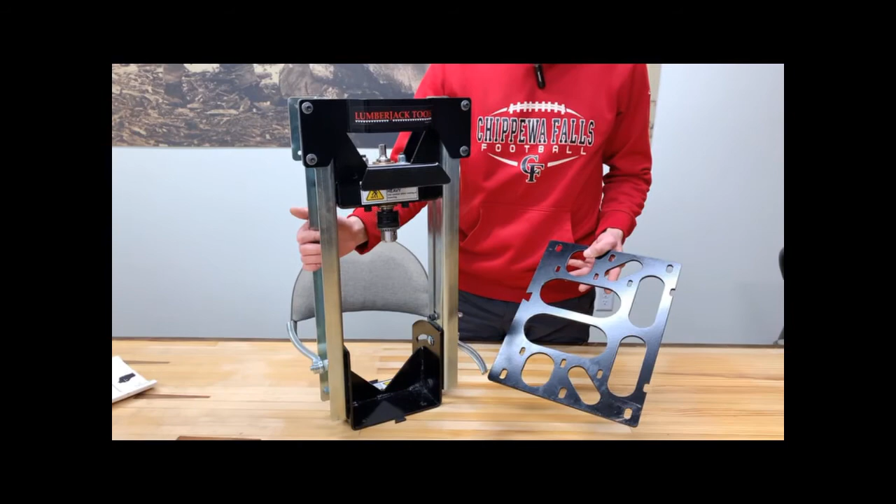So great job, you've completed your drill sergeant assembly. The last thing to do now is to take your base plate and attach it right to that dovetail on the front of your base plate of the drill sergeant. And then all we need to do is get a log lock and attach it and hook up our drill, and we're ready to cut.